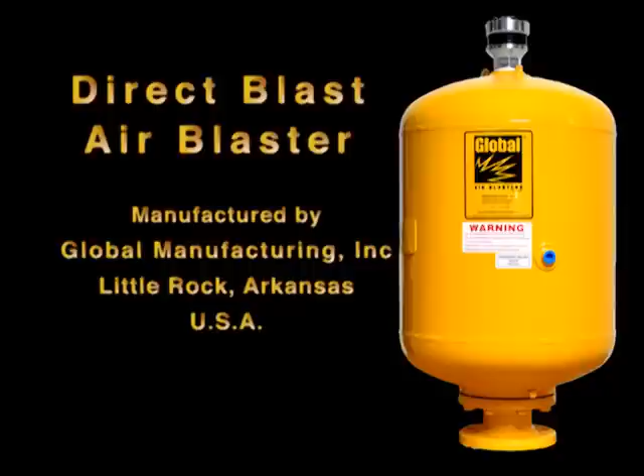Introducing Global Manufacturing's patented Direct Blast Air Blaster.

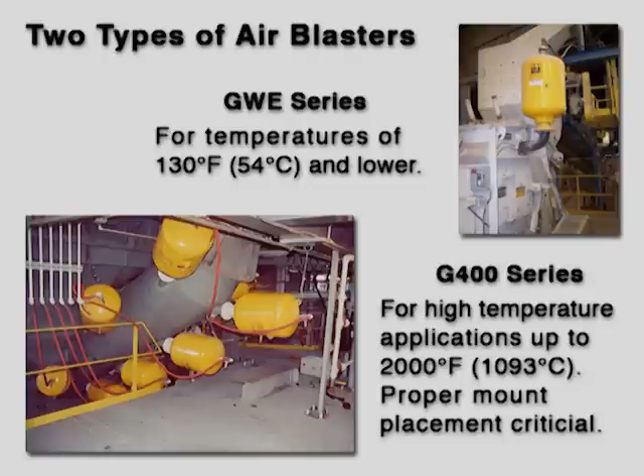We manufacture two types of blasters: our standard GWE series for applications with ambient temperatures below 130 degrees Fahrenheit, and our G400 series designed for high temperature environments such as cement kilns or steel mills. This video will focus on the blasters for use in temperatures below 130 degrees Fahrenheit.

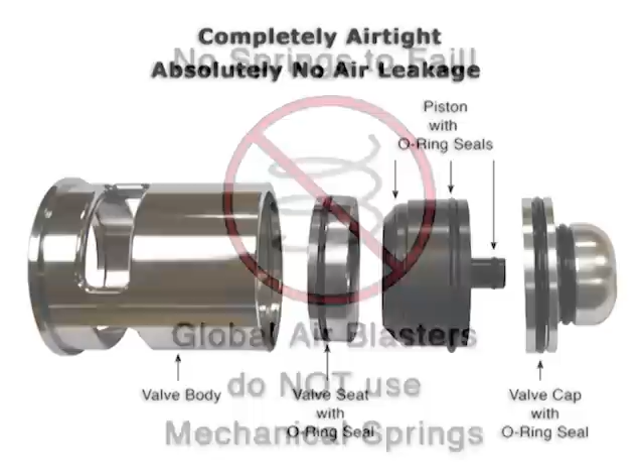What makes Global Air Blasters different? They are the only blasters that do not use mechanical springs, and unlike competitors' designs, they are designed to be completely airtight. With no springs to wear out and fail, and absolutely no air leakage, your air blaster will be ready always when you need it.

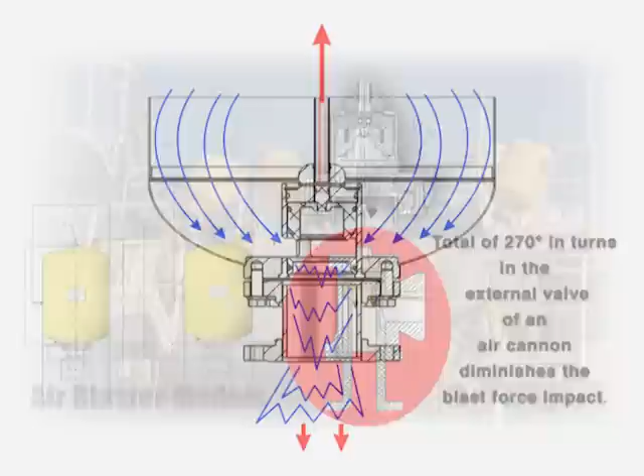Why are Global Air Blasters so powerful? Our unique valve design ensures that the air blast takes only one 90-degree turn. Some competitors' models route the air through a series of corners which total 270 degrees in bends. This winding path slows down the discharge of air and greatly reduces the blast force. Our direct blast design is why Global's air blasters have the most forceful blast of air in the industry.

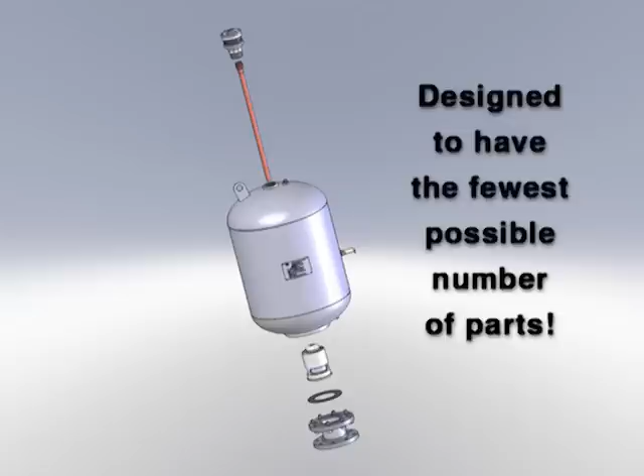Why are Global Air Blasters so competitively priced? We designed our blasters to have the fewest possible number of parts. And while simplicity may sound easy, it's actually the most difficult part of product design. We don't add any features or gizmos that raise the cost unnecessarily or do not contribute to the efficiency of the product.

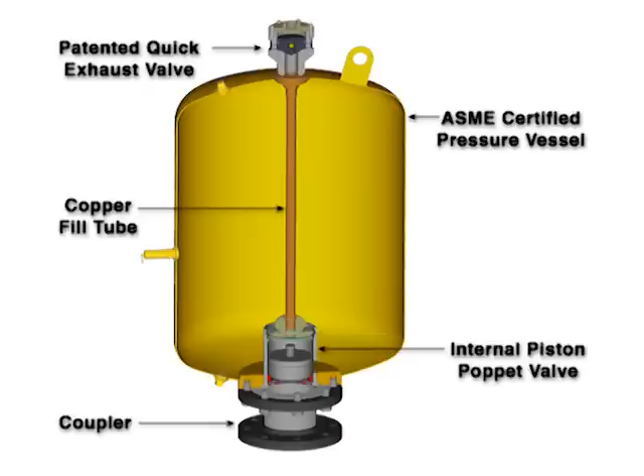What is an air blaster? An air blaster is an ASME certified pressure vessel that stores compressed air. By a combination of electrical and mechanical actions, the entire volume of compressed air is released instantaneously, providing a powerful, high-energy blast that is used to dislodge even the most difficult bulk materials.

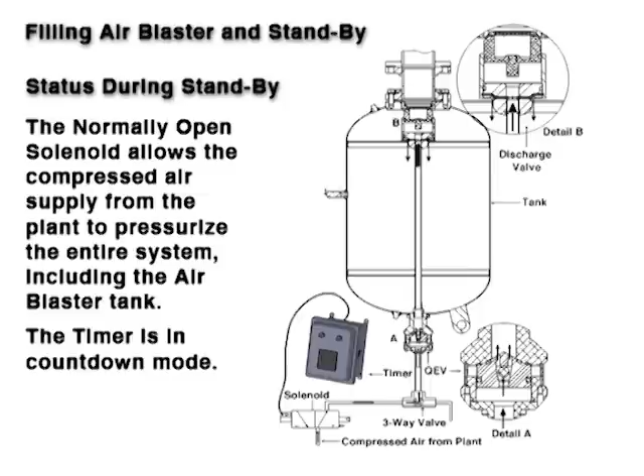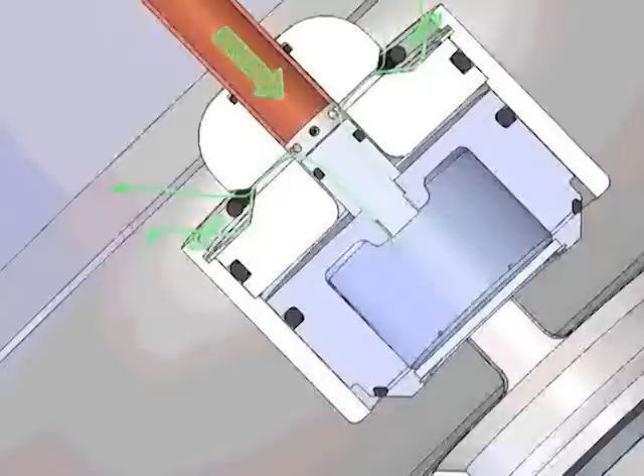Now, a brief description on how the air blaster works. The pressure vessel is pressurized through a three-way normally open solenoid valve. The air supply passes through the quick exhaust valve, down the copper line, and into the valve body. Pressure forcing the O-ring on the nose of the piston completely seals the valve against air leakage. Once the piston is seated, a one-way check valve in the valve cap is forced open and allows the air to fill the tank. Once the pressure vessel is filled, the blaster is ready to be fired.

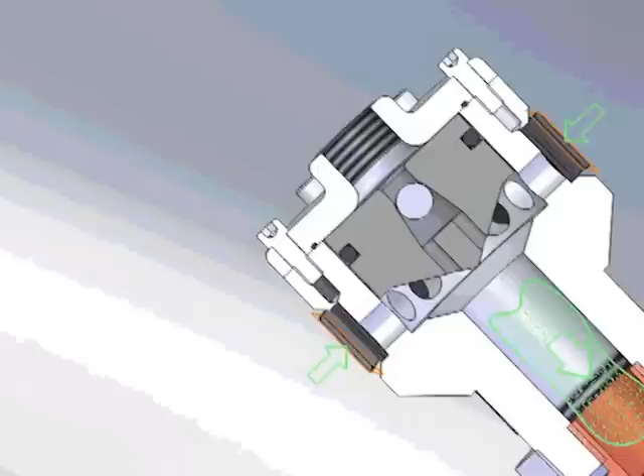To discharge or fire the air blaster, the three-way solenoid valve is energized, shutting off the air supply and releasing the air holding the quick exhaust valve piston closed. The pressure in the copper fill line and valve body blows the quick exhaust valve piston back, exposing vents in the quick exhaust valve body. This immediately reduces the pressure behind the piston, allowing the pressure in the tank to force the piston back very quickly. As the piston opens, windows in the valve body are exposed and the pressurized air in the tank immediately escapes through the discharge pipe.

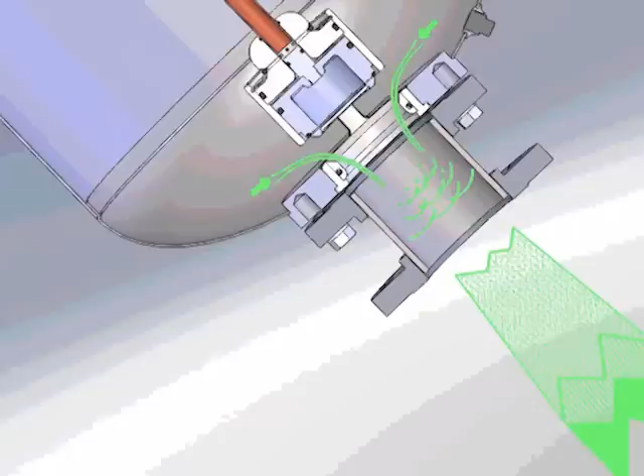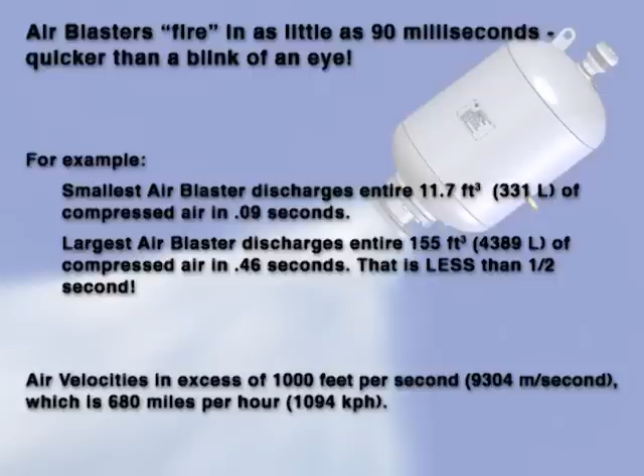Depending on the tank size, this whole process takes as little as 90 milliseconds, less than half the time it takes you to blink your eyes. For example, at 100 psi, our smallest air blaster discharges the entire 11.7 cubic feet of compressed air in just 0.09 seconds, while our largest air blaster discharges 155 cubic feet of air in 0.46 seconds, that is less than half a second. With air velocities in excess of 1,000 feet per second, which is 680 miles per hour, our largest air blaster creates approximately 4,000 pounds of force.

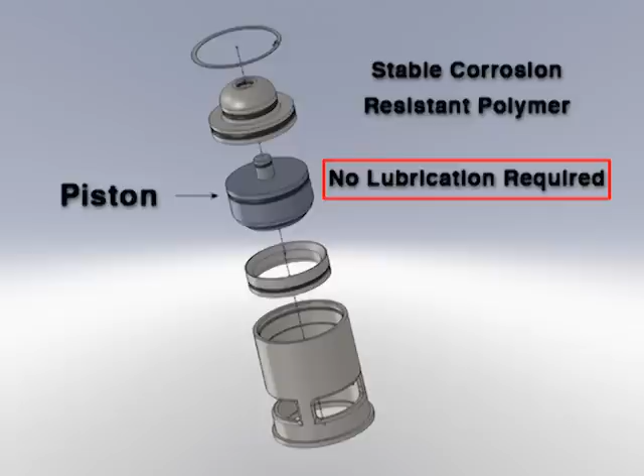Let us look at some of the key components of the air blaster. The pistons for standard applications are made of a stable corrosion-resistant polymer which requires no lubrication. Without having to buy, fill, and maintain inline lubricators, you save time and money and avoid introducing residual lubricants into the environment. The key feature of the Global design is the patented quick exhaust valve system, or air spring, which provides our air blasters with superior performance advantages over designs that use a mechanical spring.

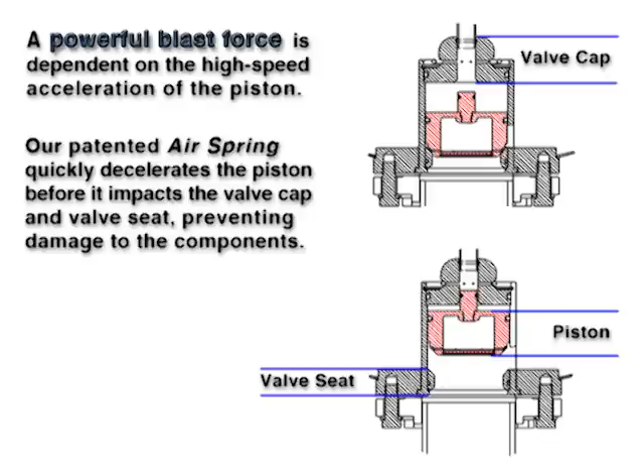To understand the value of the air spring, let's review what happens when an air blaster fires. The more quickly the piston retracts past the exhaust ports in the valve body, the more quickly the valve opens and the more forceful the blast.

This accelerated piston movement presents a problem, so it must be rapidly slowed down and brought to a stop prior to impact. If the piston impacts the valve cap at the speed it travels, it will damage both the piston and the valve cap.

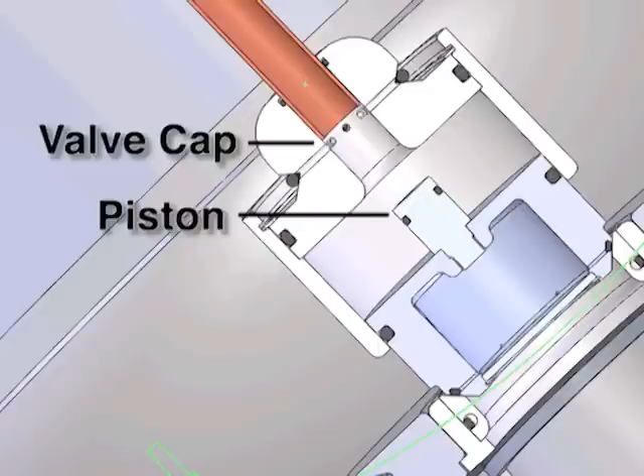Our air spring solves this problem by trapping air between the piston and the valve cap. This cushion of air halts the travel of the piston before it ever contacts the cap. Once stopped in the retracted position, it is preferable for the piston to be returned to the valve seat in a controlled manner. This controlled close is also achieved by our patented air spring design.

The greatest advantage of our air spring over a mechanical spring is its reliability. Because a mechanical spring works by resisting compression, they all eventually fatigue and break. Our testing revealed that the spring is compressed and released many times during each firing because the piston oscillates, or flutters, with the changes in the dynamic air pressure during the blast discharge.

We measured 28 high amplitude cycles and 55 low amplitude cycles during the 0.14 seconds it took the mechanical spring to close the piston. Considering that data, a mechanical spring's 1 million cycle duty rating is exceeded in as few as 12,000 firings. What's more, when a spring fails, it causes significant damage to the piston cap and valve body. That's why we designed the mechanical spring out of the Global Air Blaster.

The Global valve body and seat are triple-coated chrome plated. This unique layering of copper, nickel, and chromium provides excellent chemical resistance as well as superior protection against abrasion and wear. The valve cap is not exposed to the environment.

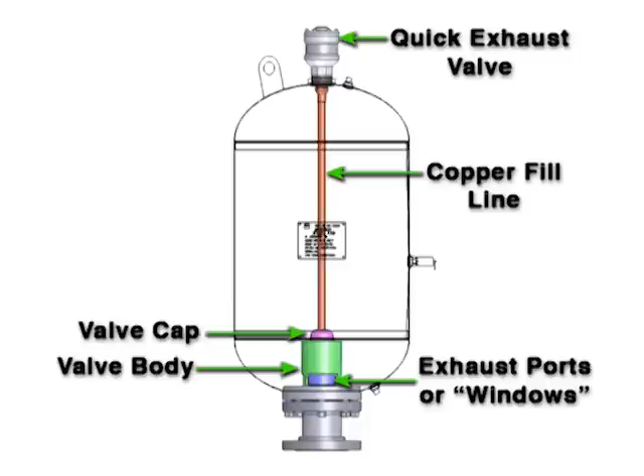It is one piece with an O-ring check valve. The cap is held in the valve body with a simple retaining ring, no screws, no other fasteners. The copper fill line is held in the cap by the rigidity of the line itself and sealed in the cap by an O-ring.

Why did we choose O-rings for our air blaster? O-rings are very reliable and significantly reduce any metal-to-metal contact. By the way, you will not find aircraft, spacecraft, artillery equipment, or even motor vehicles without O-rings.

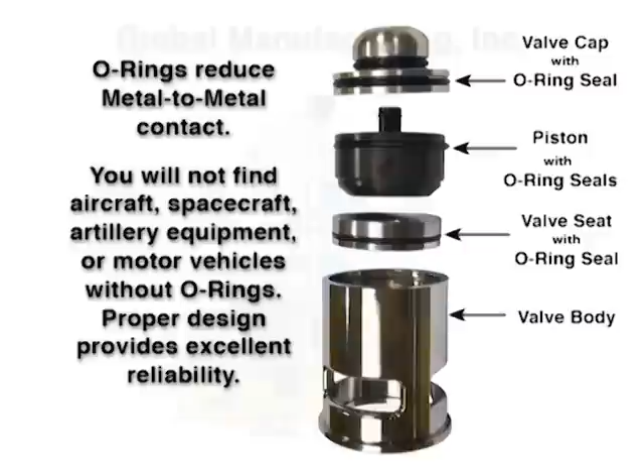During initial product development, we inspected air blasters that had 12 months of severe environment exposure, and the O-rings were nearly pristine. We hope we've given you an understanding of how our air blasters work and the components we designed for them. Our blasters are designed for maintenance-free operation.

Try them and you'll see what many satisfied users already know: Global air blasters are the best in the business.